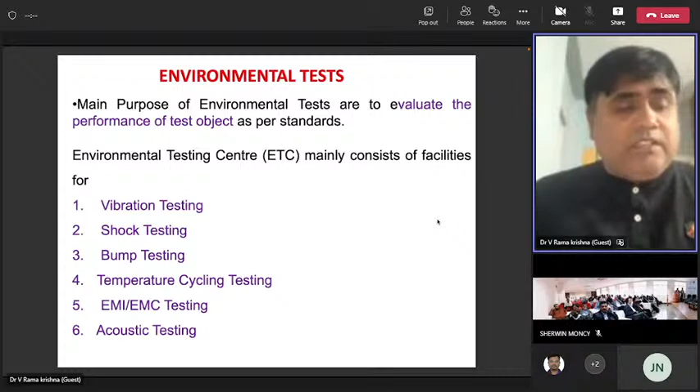There are different types of environment testing, like vibration testing, shock testing, bump testing, temperature cycling testing, EMC, as well as acoustic testing. But I want to discuss initially about vibration testing.

So what actually is meant by vibration? Vibration is nothing but the response of a system to a given excitation force. If you give a certain force to any system, how it behaves, how it responds, that is nothing but vibration. So if you hit any man, how he responds, whether he will be in a cool condition or hot condition - that response indicates the vibration of a system.

So any motion that repeats itself for a definite interval of time is also called vibration or oscillation.

In vibration testing, as I discussed, the main purpose is to validate the design for performance for its intended use, because different systems are designed for different purposes. Like at NSTL, we design certain torpedoes, mines, and decoys. The main purpose is to be validated. It will be designed and fabricated. Once fabricated, both the environment testing should prove, as well as the performance should prove.

So for a particular vibration load, it was designed, but whether it is capable of taking that load or not, we measure using vibration testing.

At NSTL, as it is a naval lab for the DRDO, we design, fabricate and test different types of underwater weapons like torpedoes, mines, and decoys. This vibration division also does vibration testing of different equipment and different types of mounts, which are given by the Indian Navy.

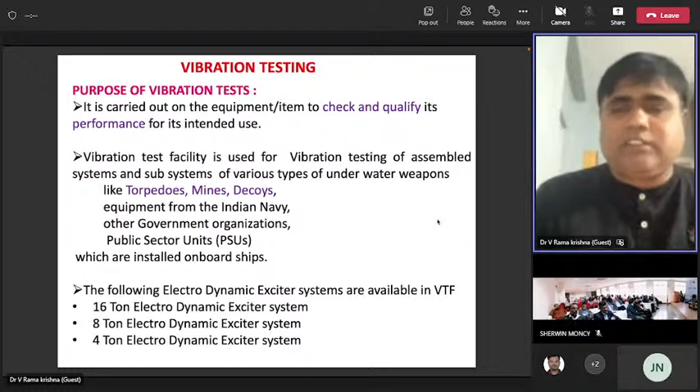The maximum specification for vibration is a payload of about 3 tons on the 16-ton shaker, maximum acceleration up to 100 G, frequency range up to 2.5 kHz, and maximum displacement of up to 38 mm.

This 16-ton shaker is a water-cooled system, and the 4-ton and 8-ton shakers are air-cooled systems. So the different standards we use depend upon the type of equipment. Some of our naval weapons use gold standards, mainly JSS 55555 as well as MIL standards, and different types of tests like endurance test, resonance test, sine test, random test, sine-on-random, and random-on-random in all 3 axes.

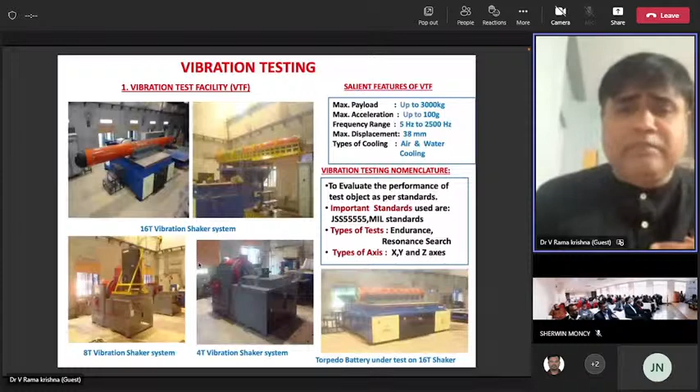So these are the typical equipments which will be used in our NSTL, and these are some of the features as discussed. There are different types of tests, and these are state of the art test facilities. As discussed, it is one of the second biggest, having a 2.5 by 2.5 table size with different types of shakers available for different types of tests: sine test, random test, sine-on-random, random-on-random, etc.

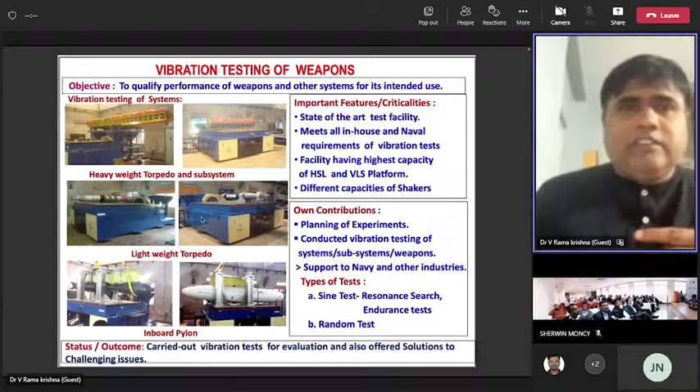And these are some of the components we'll go through using the vibration testing. This is one type of testing which we have done for the qualification testing of one of the varieties of torpedo. We did both the sine test as well as the random test, and both tests in all axes have been successfully carried out and approved. It has now been done for the validation trials for the Indian Navy.

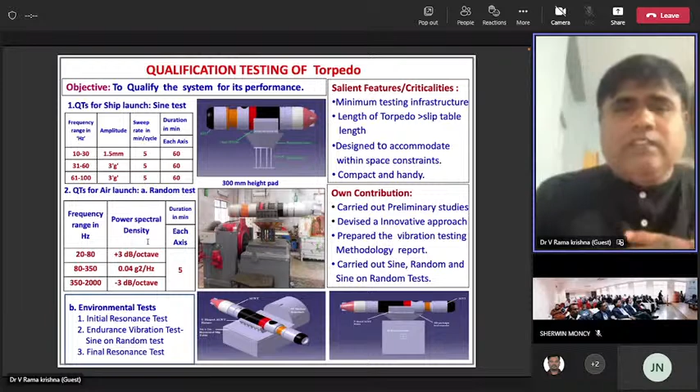The main principle behind this vibration testing is Fleming's left hand rule. As we know, the electric current is shown by the middle finger, and the magnetic flux is shown by the forefinger. The force, excitation force, is depicted by the thumb. Both are in 3 mutually perpendicular directions, and it mainly works on F equals BIL, where B is the magnetic flux density, I is the current, and L is the length of the drive coil, and that excitation force is equivalent.

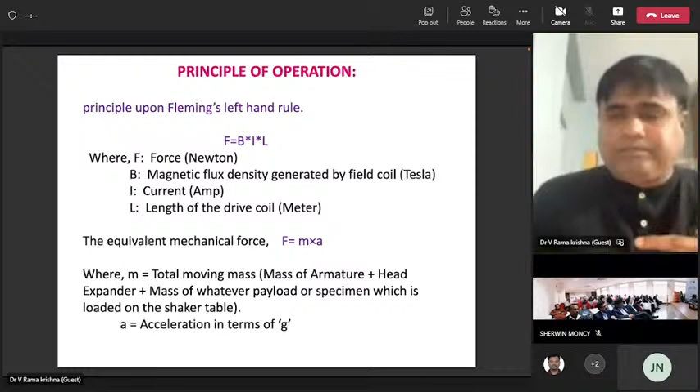This force is also equivalent to mass as the product of mass and acceleration. The total mass indicates the mass of the armature and the head expander, as well as the payload of the specimen. The main important parts of the vibration shaker are the controller, power amplifiers, and the electrodynamic shaker, as well as the horizontal slip table, vertical load support platform, and the cooling system. These are the important parts of the exciter system.

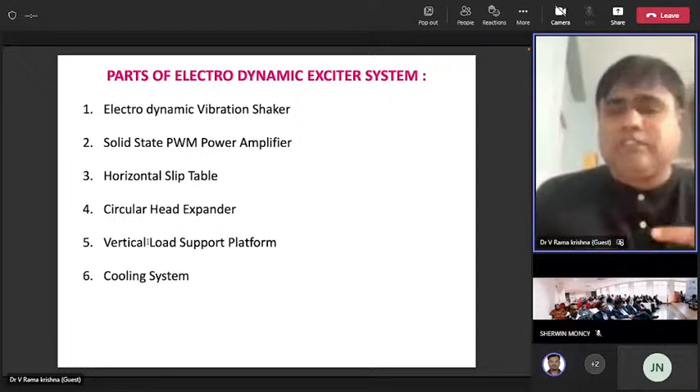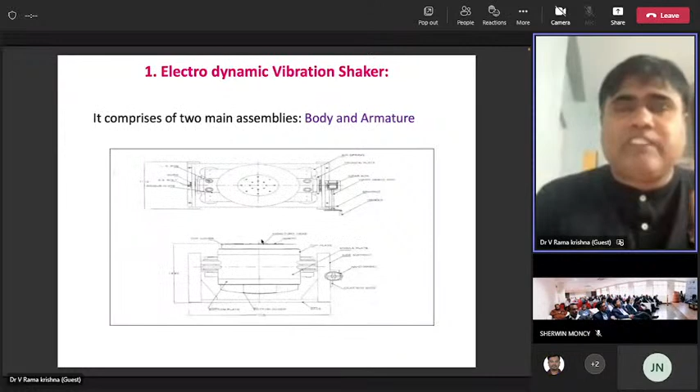This figure shows the dynamic vibration shaker, mainly consisting of the armature and the body. The inside part is the armature, the outside part is the body. Supply is given to this armature as well as the body, and the magnetic flux is generated perpendicular at 90 degrees, and the corresponding excitation force is generated in the vertically upward direction. That is the main source of energy required for the excitation of the different types of particles.

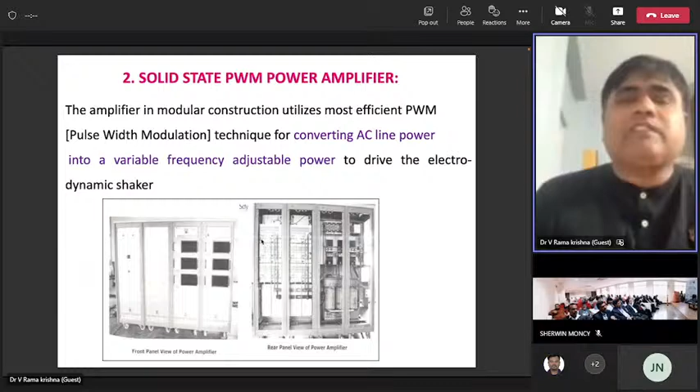And these are the power amplifiers, where the given input excitation is provided using the controller. The controller sends a signal to the power amplifier where amplification takes place. From the amplifier, the signal goes to the shaker, and the shaker is connected to the vertical load support or the horizontal platform using a bull nose connector, and then excitation takes place. The main purpose of the power amplifier is to amplify the signal, and the AC signal is converted to VVF, variable frequency drive. That is the main aim of this power amplifier.

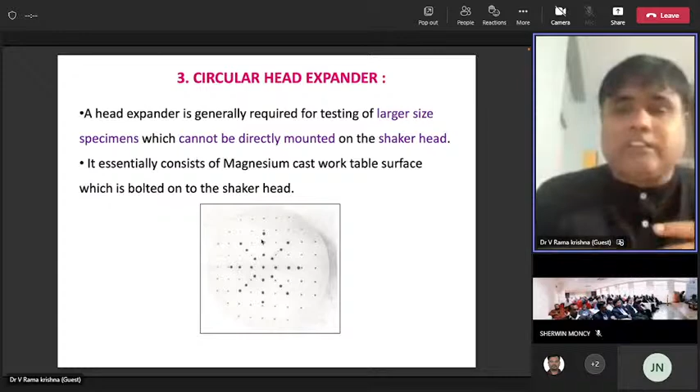And the circular head expander, this will be connected to the vertical Z direction, where we cannot accommodate our objects directly on the shaker head. So this is a separate unit made up of magnesium alloy. This will be assembled in the vertical direction, and then the object required for the vibration will be assembled to the circular head expander. Similarly, this is the horizontal slip table.

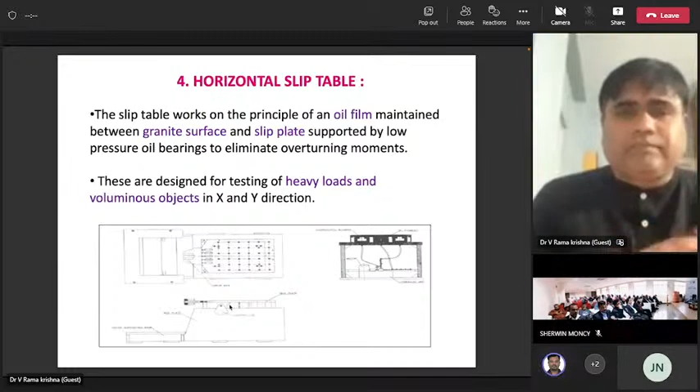The horizontal slip table is the place where we assemble our heavy load objects onto the horizontal slip table, and we can do vibrations in both the x direction and the y direction. Here, one oil film is maintained between the granite surface and the slip table to avoid friction, to reduce the friction. That is the main purpose of the horizontal slip table.

And the vertical load support platform is directly connected. So for some of the big objects, we cannot directly connect them onto the shaker head in the vertical direction, that is the Z direction.

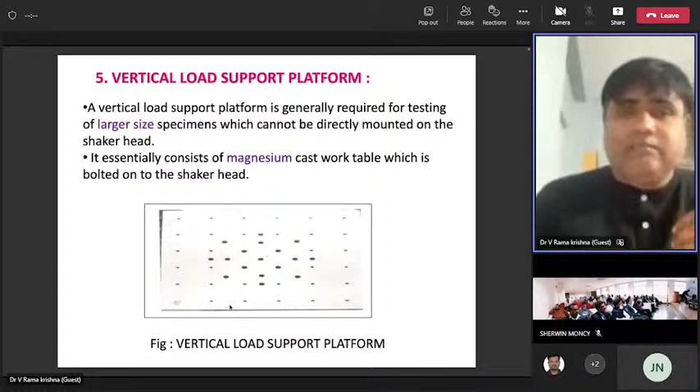This vertical load support platform for a 16-ton shaker with a 2.5 by 2.5 size can be assembled on the shaker head, and objects required for the vibration system will be connected to this VLS platform. This enables vibration testing in the Z direction. It is also made up of magnesium alloy, which has high damping properties.

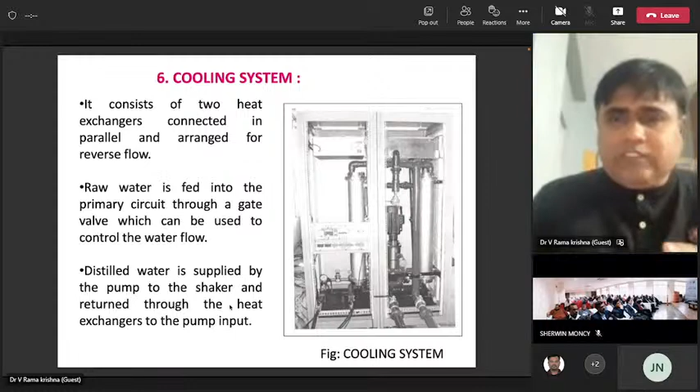The cooling system for 4-ton and 8-ton shakers is air cooling, but for a 16-ton shaker we have a water cooling system. There are two units with a heat exchanger present in between, where the temperature generated inside the shaker is reduced using distilled water. The distilled water circulated from the shaker exchanges heat with incoming cool water, so the temperature of the distilled water reduces while the incoming water's temperature increases. This heat transfer takes place continuously in a circle. That is the main aim of the water cooling system.

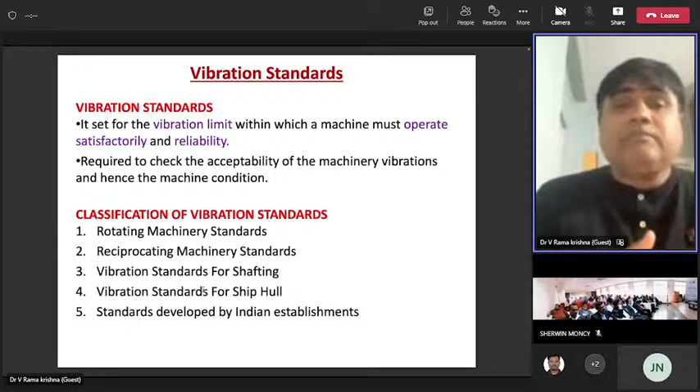We do vibration testing with different types of standards for different applications, such as rotating machinery standards, reciprocating machinery standards, and vibration standards for shafting systems. For ship hulls, different types of standards exist. Some standards are developed by Indian companies like NTPC, NSTL, and ONGC for different applications. For rotating machinery, there are standards like SNAME for the USA, ISO standards, Bureau Veritas standards, VDI standards, and Canadian IS standards. These are the different types of standards used for different applications.

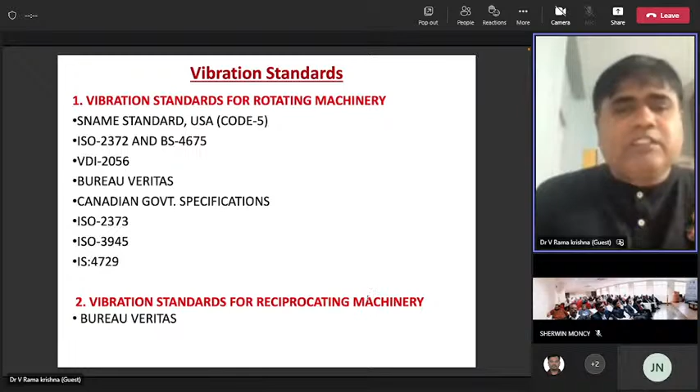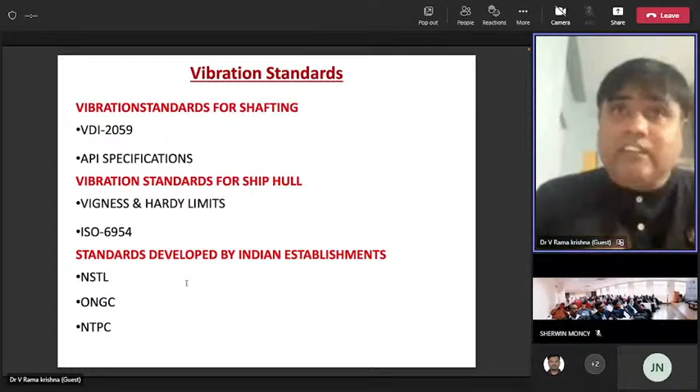For rotating and reciprocating machinery, we mainly use the Bureau Veritas standard. For shaft systems like propeller shafts or other connecting shafts, VDI and API standards are used. For ship hulls, Vigness and Hardy limits standards are used, as well as ISO standards. Some Indian establishments have developed their own standards as well-NSTL has our own standard for different applications, and ONGC and NTPC also have different standards for different applications.

In addition to our internal testing, we also support other DRDO testing labs, like ADA Bangalore for pylons, since this facility is the second biggest in India and many people come here for testing. Equipment from BEL, BDL, and ECIL also comes here, mainly for supply to the Indian Navy, and some private companies use this facility as well.

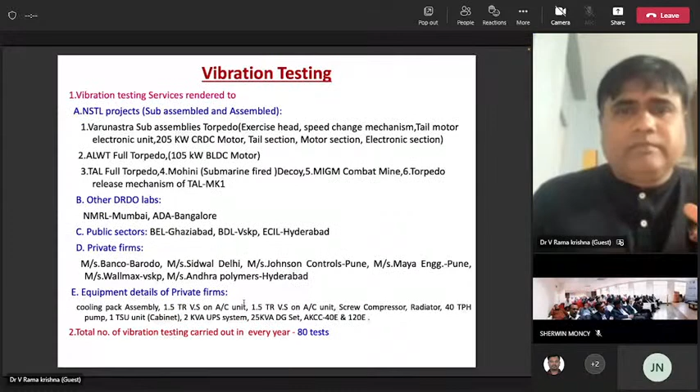Broadly, we do around 80 to 100 vibration tests yearly, depending on the workload. These are the basics about vibration testing. My second topic is vibration control, but before discussing vibration control, I want to discuss stealth technology-what is meant by stealth?

As we've seen, these are two types of ships, Visby and DDX, and two other types, F-218 and D-187. In most of these, the radars, guns, and torpedo launchers are visible from outside. But in these two figures, everything is covered inside and not visible from outside-these are called stealth ships, while the other two are non-stealth ships. So what is meant by stealth?

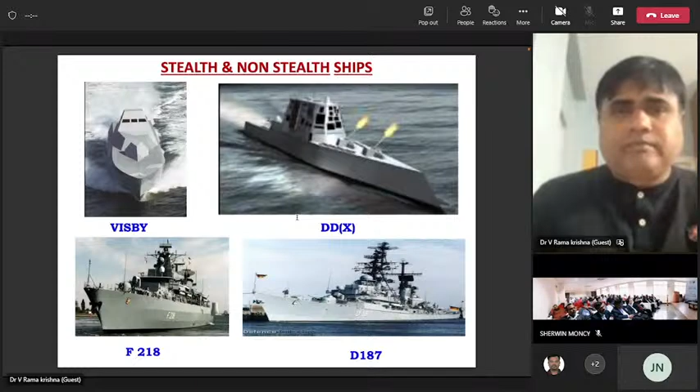First of all, we have to protect our ships and submarines from incoming enemy bombs or guided missiles. So we have to protect our marine platforms, both the above-water structure and the below-water structure. Above the water is called the superstructure, and below the water is the hull structure. The enemy can launch missiles or bombs targeting the superstructure, and can also launch torpedoes or underwater mines from the sea, so we have to protect the hull from the sea as well.

If we become more stealthier, in addition to protecting our equipment, ships and submarines, we get the chance to have first strike capability. If the enemy cannot detect us, we can hit the enemy first. We can go near the enemy and strike them.

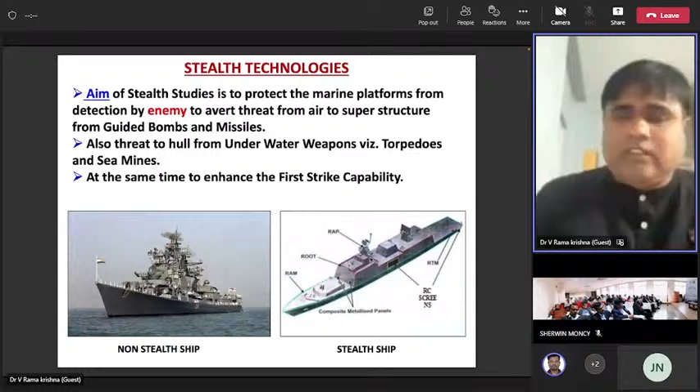Some ships are non-stealth, others are stealth-like. On the outside, if we create structures like radar absorbing structures, radar absorbing materials, and RCS screens for the ship, we reduce one of the key signatures. Radar cross section is one of the signatures we can reduce from the outside, above the water level. Below the water, other signatures exist.

So what does creating a signature actually mean? We have to create our signatures so as to avoid detection by the enemy. If we make our signatures equivalent to the atmospheric signal, we can reduce our noise, our IR, and our RCS, so the enemy cannot identify whether there is a ship or just normal atmosphere. That is the main aim of stealth.

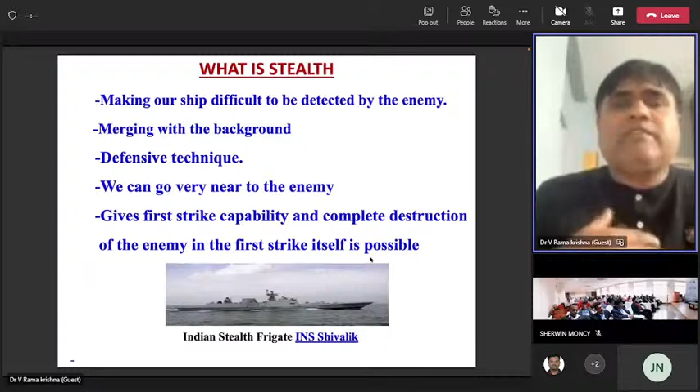Because if we become stealthier, and this is a defense technology, we can approach the enemy and hit them fast, so that we win the war. That is the main aim of stealth. These are broadly the spectrum of stealth technologies.

These are the signatures that need to be reduced to become more stealthy, like acoustics. In acoustics, we have vibration and noise signatures. Then there's IR, the infrared signature, because most ships and submarines generate heat or exhaust at a certain temperature. These signatures need to be reduced.

Radar cross section, as we discussed, relates to the shape of the structure above the water level - these shapes are to be modified to avoid radar cross section. There's also LCS, laser cross section, which we also have to reduce for the superstructure.

And hydrodynamic wake, which is a bubble-like structure that trails behind the ship as it moves. This hydrodynamic wake also needs to be reduced.

And magnetic signature - as the ship or submarine is made of magnetic material, and the earth has its own magnetic field, these two factors combine to develop magnetic signatures. The enemy can detect these signatures too, so they need to be reduced.

And ELF, extremely low frequency emission signatures, are generated because of the two dissimilar materials of the ship and the propeller. The ship is made of magnetic material like iron, while the propeller is bronze or another kind of material. Because of these dissimilar materials, ELF signatures are generated, and the enemy can detect them too. If we reduce all these signatures and make our ships and submarines equivalent to the atmospheric signature, we become the most stealthy, so the enemy cannot detect us.

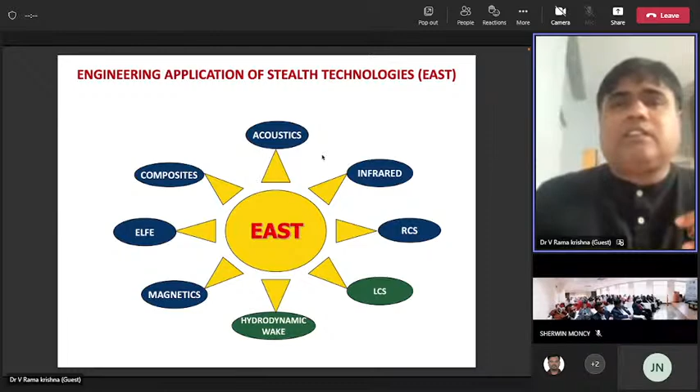Out of these signatures, I will discuss the vibration acoustic signature. Underwater, the enemy can detect using sonar - let's assume this is the ship and this is the submarine, where our sonar sends an acoustic signal. In air, electromagnetic signatures work, but underwater EM signatures won't work, so hydroacoustic signature is mainly useful for detection underwater. So underwater, only acoustic signals are sent - it sends a signal and receives a signal. Depending on the received signal, we can identify where the ship or submarine is located.

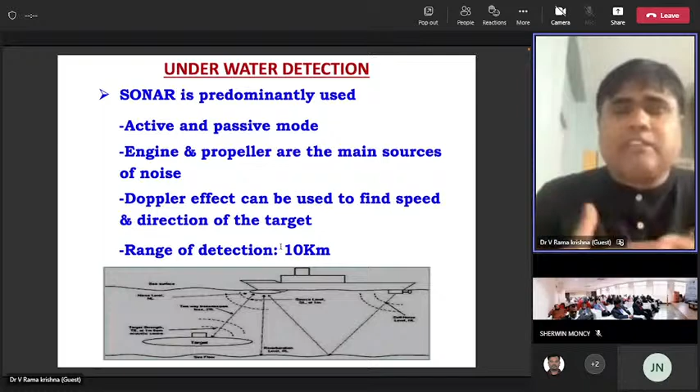Acoustic stealth is one of the most effective methods for detecting underwater naval vessels. Acoustic signature is the main prominent signature where we can detect. We can increase our acoustic stealth capability by minimizing the acoustic energy created by all the machines.

As we know, in ships and submarines there are different types of sources, like engines, gas turbines, pumps, motors, etc. All these, because of unbalanced forces and couples, generate vibrations. These vibrations are transmitted from the source to the underwater hull through the path, and from there transmitted from the hull.

It is transmitted as radiated noise inside the water. These are called machinery noise. The noise and vibrations generated inside the engine room are called machinery noise.

The propeller, which rotates at the back of the ship's hull, when rotating cuts the water and generates propeller noise. This is machinery noise and propeller noise.

When the ship moves through water, it cuts the water, and because of turbulent boundary layer excitation on the incoming fluid, the ship also vibrates. That is called flow noise. Flow noise, machinery noise, and propeller noise combined are called radiated noise.

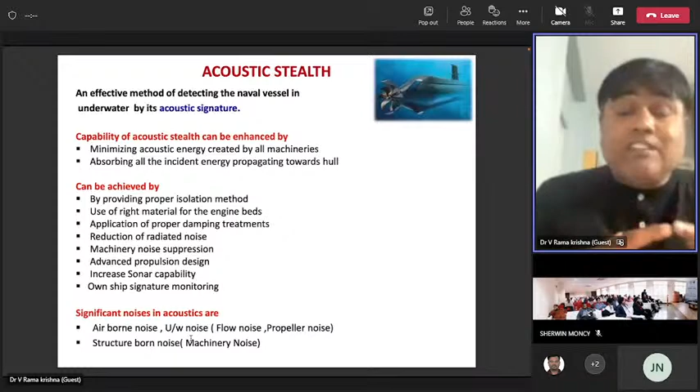Structure-borne noise is the machinery noise, as discussed previously. These types of noises are to be minimized to become acoustically stealth.

As we know, underwater there are sound waves also. A sound wave is nothing but a pressure disturbance that propagates. When the disturbance starts, it propagates from one place to another, and the speed at which it transmits depends upon the medium. The main reason for sound waves is the vibration of solid surfaces.

Any sound which is objectionable to us is called noise. The main difference between sound and noise is that noise is not useful, or is objectionable to the human ear, and is called noise.

The acoustic signal is generated from the source and travels to the receiver. From the source to receiver, it transmits through so many paths. In between the path, there are airborne noise and structure-borne noise segments, and different types of routes—structure-borne noise, airborne noise, and so on.

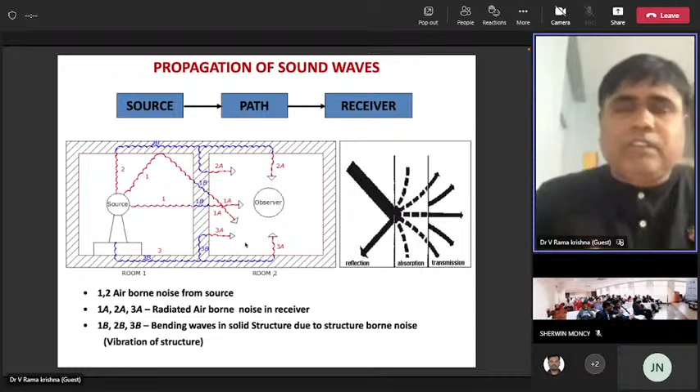If we can reduce this acoustic noise at the source itself, that is better. If not possible, we can reduce it in the path through which it is transmitting. If it is not feasible at the source or path, we can reduce it at the receiver side. These are the three modes of reduction: source, path, or receiver.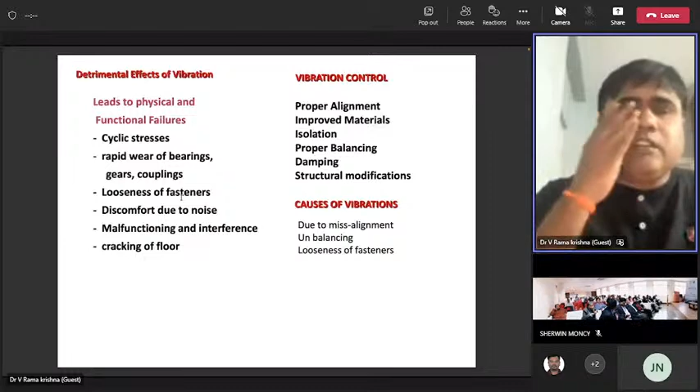Because of this vibration, certain problems are observed in physical equipment, such as physical failure or functional failure. It may not operate, or it may get physically damaged because of cyclic stresses, or because of wear of bearings, gearing, and coupling. Vibration may also lead to failure or looseness of fasteners, or generate noise that causes discomfort to the human operator, and it leads to malfunction of the equipment and ultimately failure.

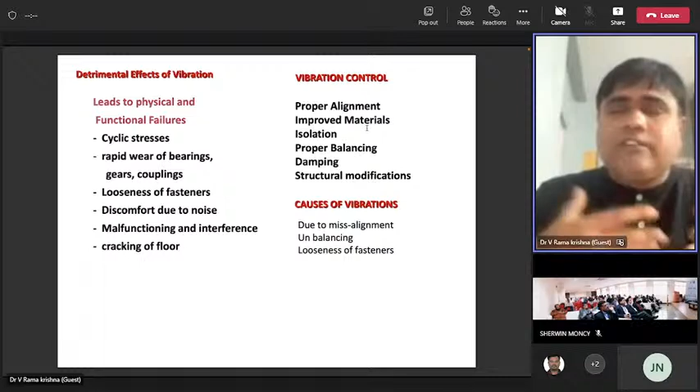So how to control these vibrations to avoid these failures? By proper alignment, the shafts will be properly aligned, or by improving the different types of best materials, or by proper isolation methods, isolation techniques can be made, and proper balancing also can be made, or damping, different types of damping layers, damping structures like free layer damping treatment, or constrained layer damping treatment, or tuned mass dampers, or MR magneto-rheological dampers. We can do different types of control, or by changing the structure. Structurally, you can modify to control the vibrations. These are some other control techniques.

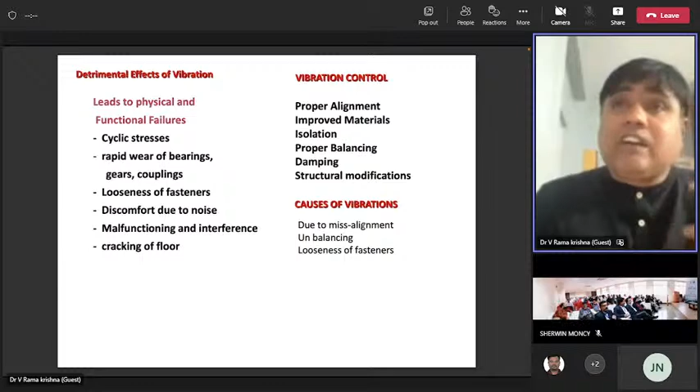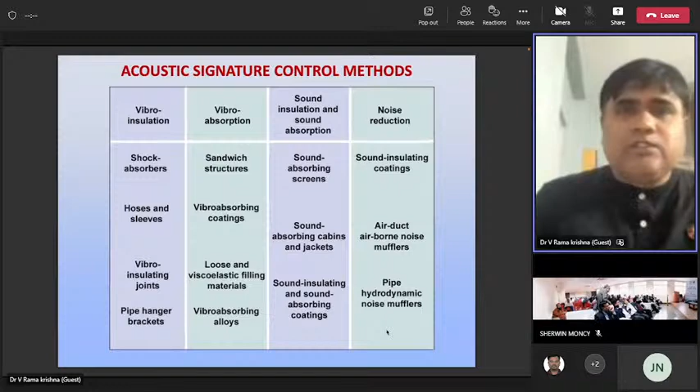Or noise levels can be reduced by using sound insulating coatings, air ducts, mufflers, or hydrodynamic noise mufflers. We can use these techniques to reduce the vibration as well as the noise levels.

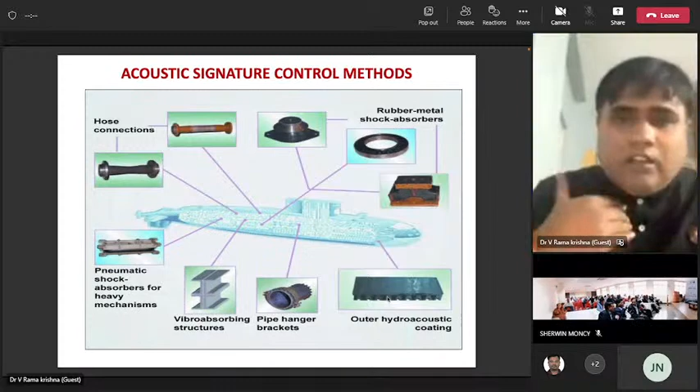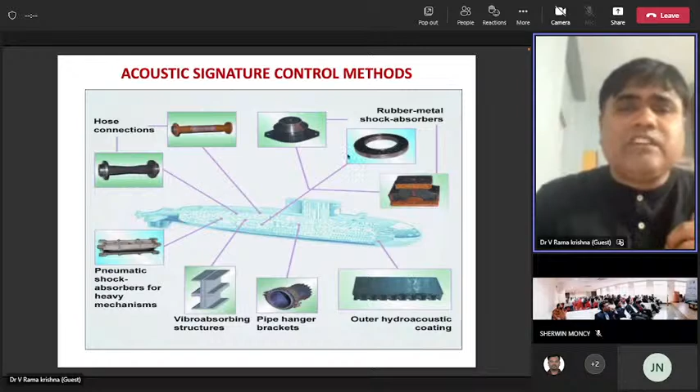Or hydroacoustic coatings, like submarine hulls will mainly use outer hydroacoustic coating, and pipe hangers, absorbing structures, or pneumatic mounts, or hose connections. Different types of components will be installed to reduce this acoustic signature.

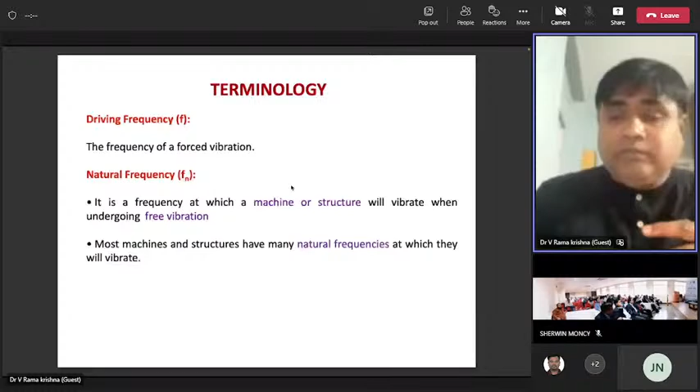So as we know, these are some basic definitions. Driving frequency is the frequency of the forced vibration. Natural frequency of the system is nothing but the frequency of the structure when it is operating with free vibration. And these two vibrations should not be coincident to avoid resonance.

When the natural frequency and the excited frequency both match, it leads to resonance, which is a catastrophic failure. This condition should be avoided while designing structures. And the speed at which the resonance frequency occurs is called the critical speed of the equipment.

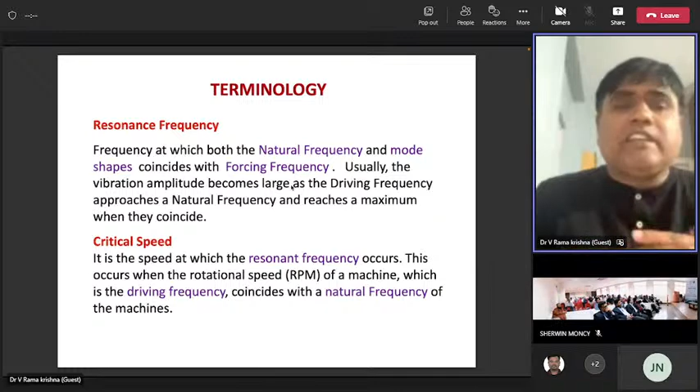And some other basic definitions: damping is nothing but dissipation of vibration energy into heat energy. That is damping. And there are undamped and damped vibrations as well.

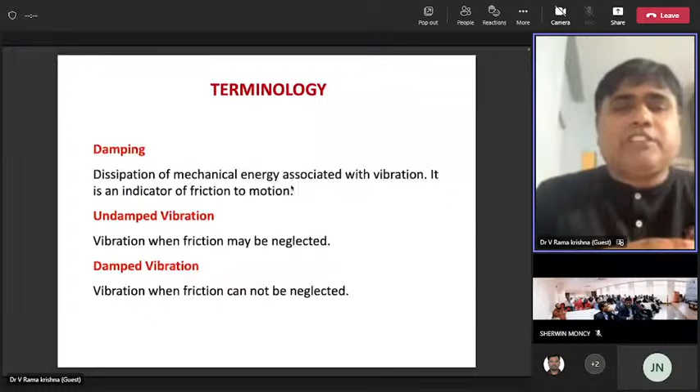And some of the acoustic products which have been designed, fabricated, tested and fitted onboard ships for the last 20 to 30 years at NSTL. These are some of the equipment carried out to reduce these noise levels: the two-stage isolation system, acoustic silencers, acoustic enclosures, and damping treatments, free layer damping and constrained layer damping treatment, and advanced damping materials, and TMDs, tunable mass dampers, MR dampers, magneto-rheological dampers, and thermoacoustic silencers, and active noise cancellation techniques.

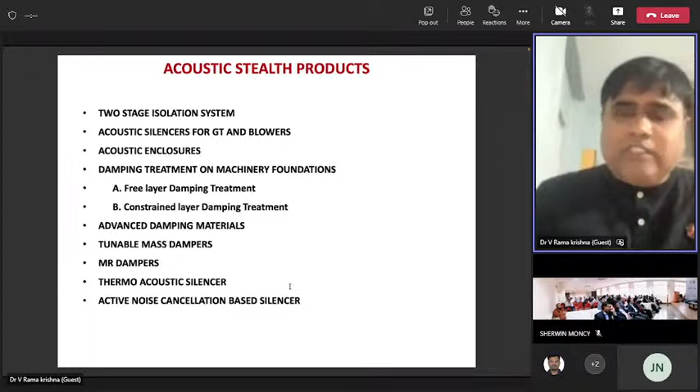These are the types of some other products developed by NSTL to avoid detection by the enemy, to become more stealthy.

So first of all, let's discuss vibration isolation. What is actually meant by isolation? Vibration isolation is nothing but avoiding the transmission of vibration from the source to the receiver. Any pump or gas turbine will be resting onto the foundation, and from this foundation...

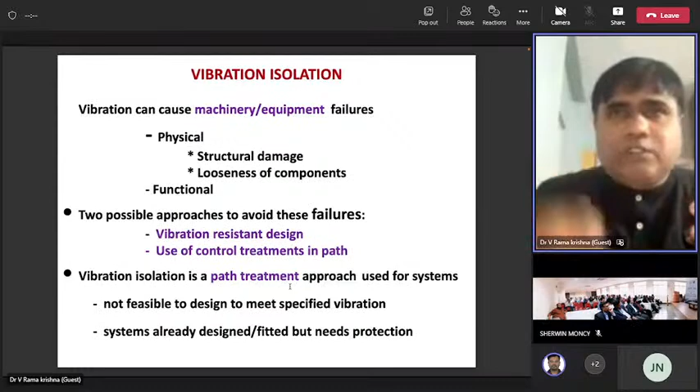Yes. So the vibrations are transmitted from the source to the receiver, to the foundation. In between these, there are two types of systems. Let us assume this is a forced vibration of the spring mass damper system, which is connected to the mass system.

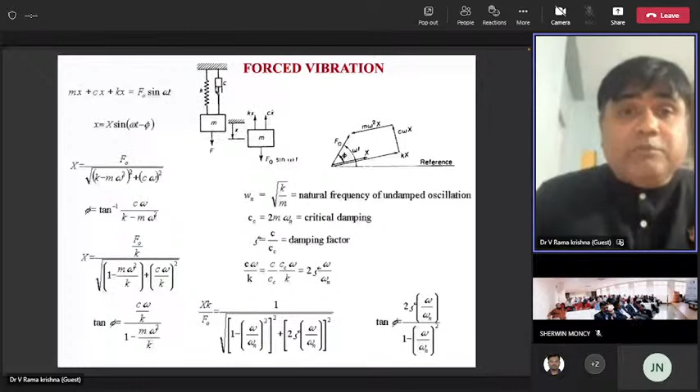In between that, if you keep some springs or dampers, we can reduce the vibration from the source to the receiver. And this is the vectorial representation. The main aim, the main intention, is transmissibility. Transmissibility is nothing but the force transmitted versus the force applied. The transmitted force, the force applied, is to be reduced from the hull. This is the transmissibility curve.

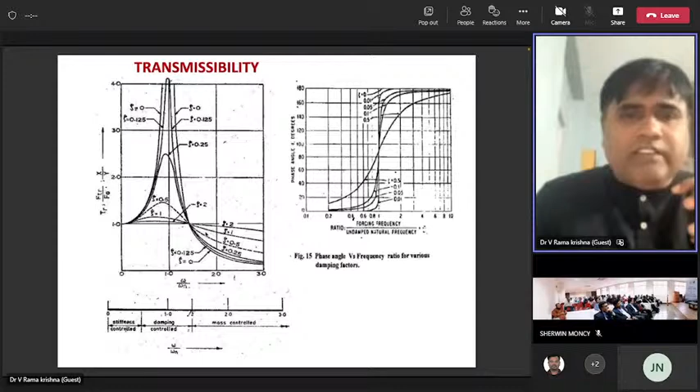Basically, we have to create the isolation zone and the amplification zone. If omega by omega n is equal to 1, the resonance condition occurs, where the amplitude transmissibility increases to infinity. Our aim is to design the isolation zone where omega by omega n is greater than root 2, where we can apply different types of damping treatment to reduce the transmission. This is our design area of zone of intention, where omega is greater than root 2.

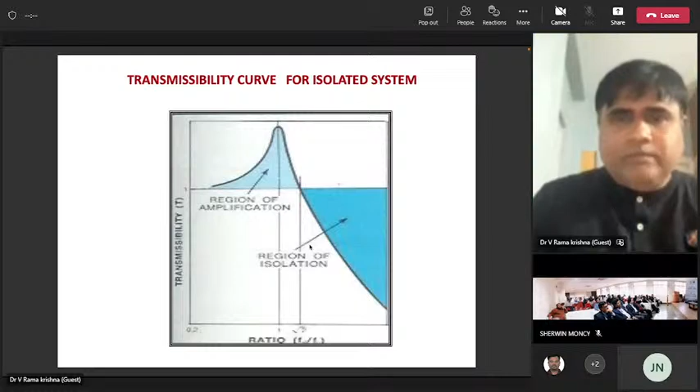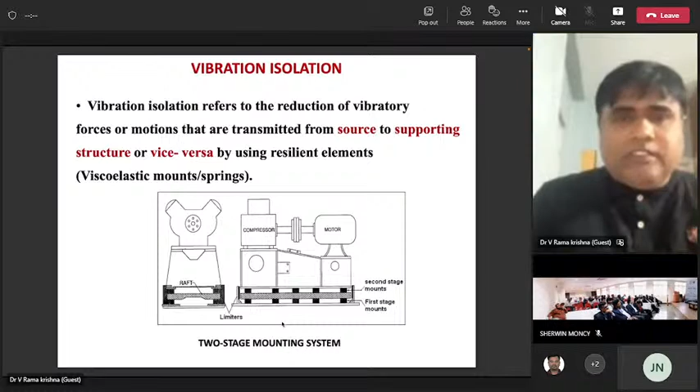This is the typical two-stage isolation system. These are the two-stage isolation equations, and this is the design procedure. I'll just skip all these slides.

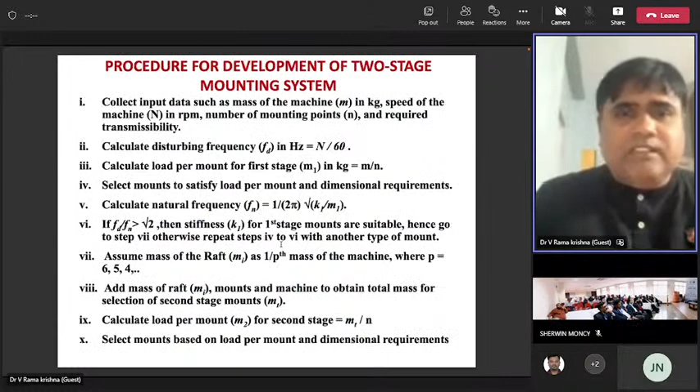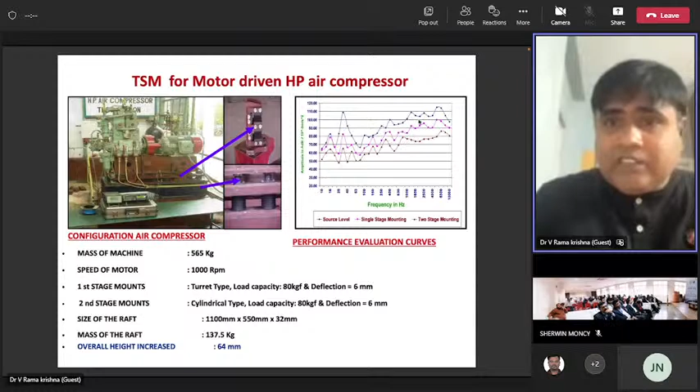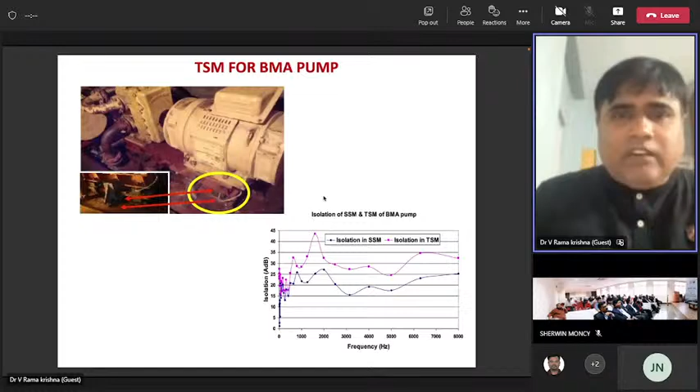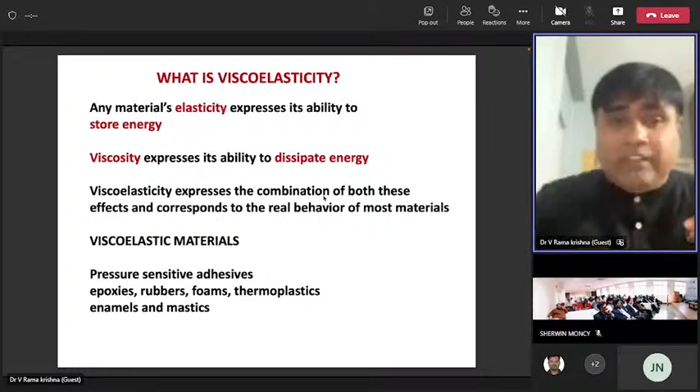The second control method is vibration control by damping. Damping is nothing but the viscoelastic nature of the material, like rubber products. It has both elastic nature as well as viscous nature. Both natures are mainly useful to convert the vibration energy to heat energy, using equipment like rubbers, foams, thermoplastics, enamels, and mastics.

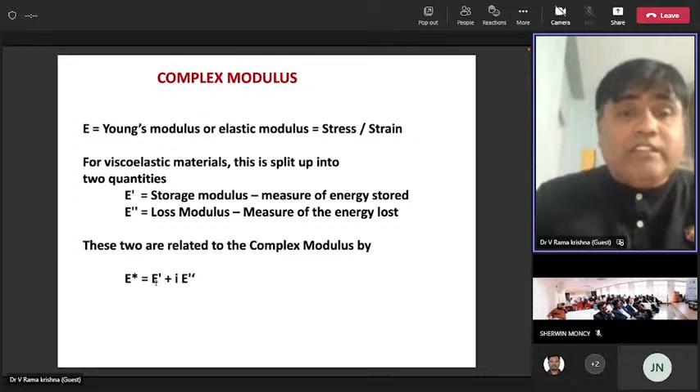Instead of Young's modulus, this component mainly considers complex modulus, consisting of E prime and E double prime - storage modulus and loss modulus. Loss modulus is the energy that is going to be lost, the conversion of vibration energy into heat energy, called the loss factor. This is the equation for the loss factor.

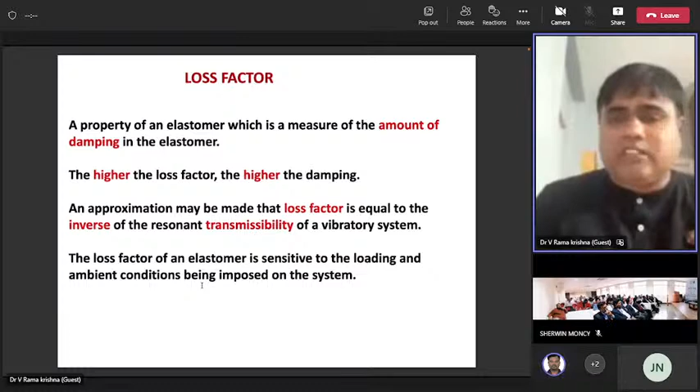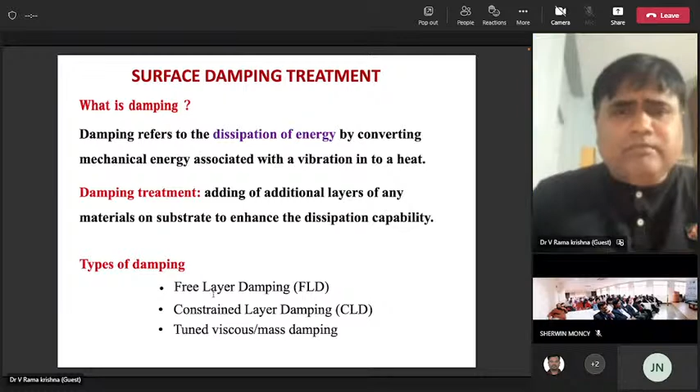There are mainly two types: free layer damping treatment and constrained layer damping treatment, along with the tuned mass damper. The main difference between these two is that FLD, free layer damping treatment, mainly consists of two layers - the base layer that we bond with the damping material - and the vibration conversion takes place using elastic nature or bending treatment.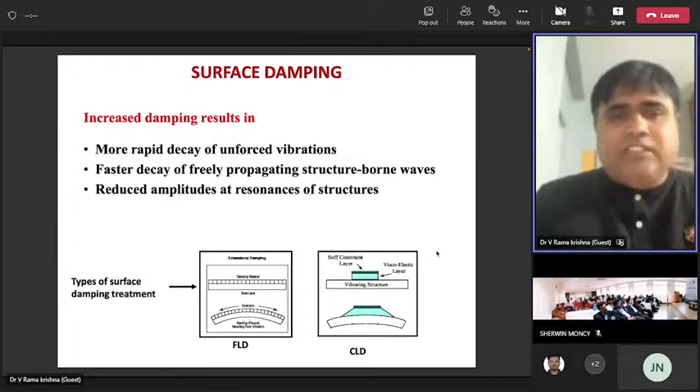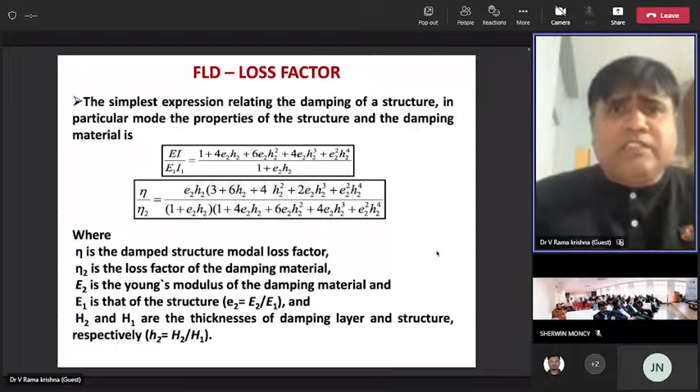This is a three-layer structure, where the vibration structure is divided so that a viscous layer is bonded, and above it the constraint layer - this is the constrained layer structure. Both are useful for different applications. This is the loss factor equation, where the higher the loss factor, the higher the conversion of energy. And this is the design of the FLD.

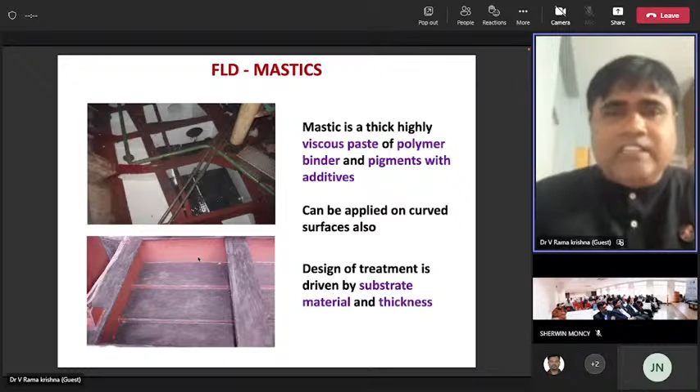This mastic FLD has been applied in some areas and on the barge as well as inside the ship. There has been a drastic reduction of vibration levels, and underwater noise can also be reduced by around 20 dB for a broadband spectrum.

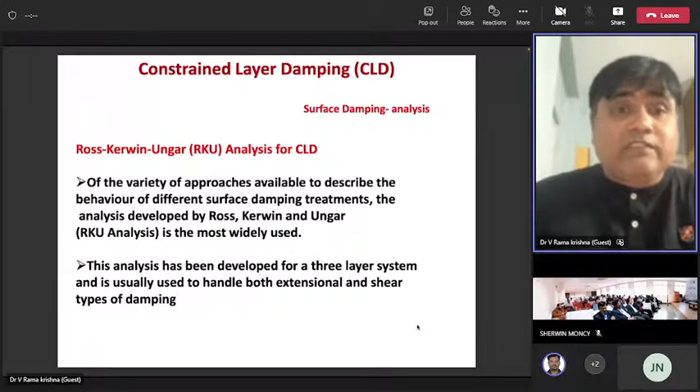This is the CLD damping treatment, which was designed using the RKU equation, Ross-Kerwin-Ungar equation. These are the applications where different foundations, different base plates, and different equipment inside the ship have been carried out, reducing both noise levels and vibration levels.

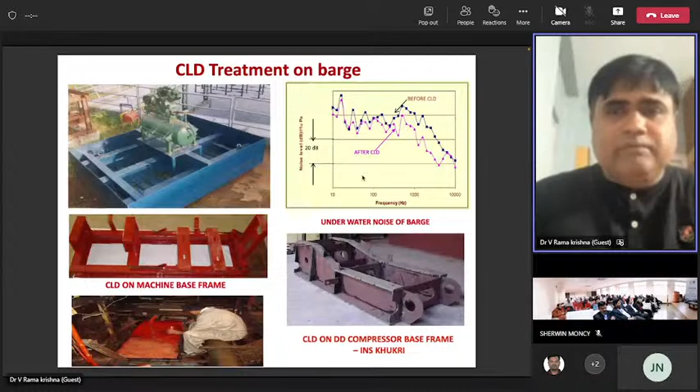Finally, the tuned mass damper. The main aim of the TMD is vibration reduction of tonal vibrations. As we know, at the natural frequency, vibration levels are higher. If you want to further reduce these tonal vibrations, we have to incorporate different types of separate equipment.

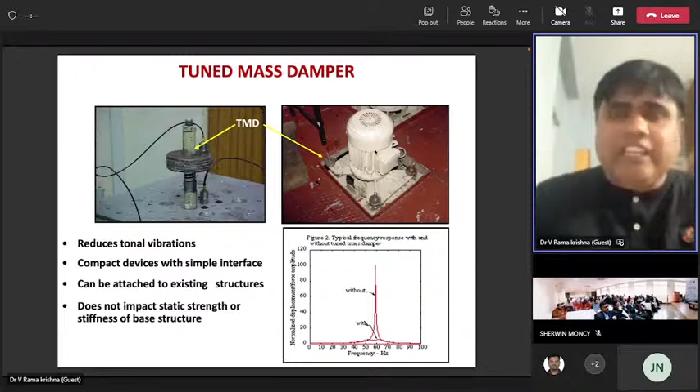We assemble these TMDs around the main base source, so that the base source vibration level will be reduced. The noise and vibration levels of the base source will be reduced. The main important factor here is that the natural frequency of the TMDs as well as the motors should be equal - only then can we reduce the transmitted vibration levels. These are the typical seawater pump test results of the TMDs.

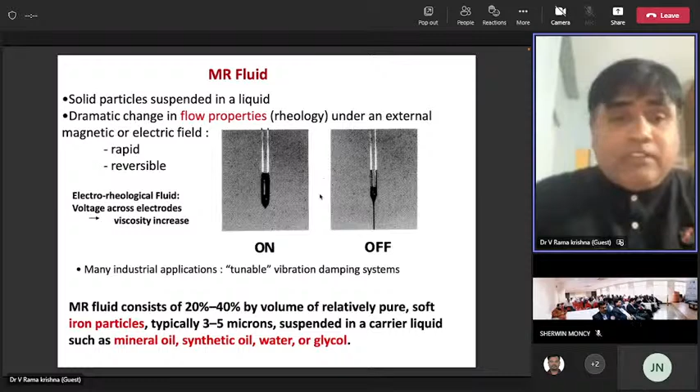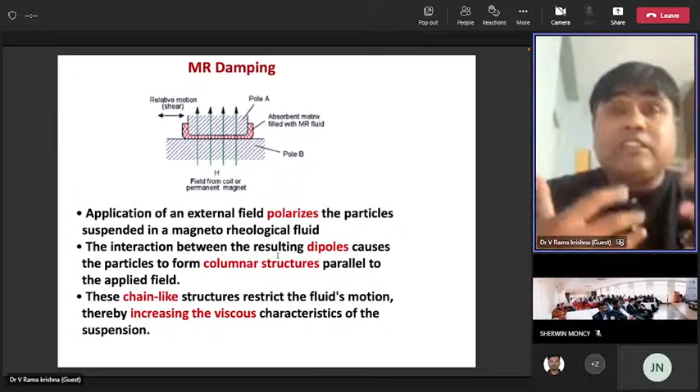And last are the ER dampers, the magnetorheological dampers, where the main aim is to change the flow properties of these particles so that vibration levels can be reduced. The main important components are the iron particles and mineral oils. If you supply a magnetic field or electricity, a chain-like structure is generated where the viscosity of the particles increases, and the vibration levels are reduced because of these ER dampers. These MR damper applications have been tested in Indian Navy ships.

Finally, active vibration control. Till now we discussed passive devices - vibration isolation, damping, and MRD - these are passive vibration control. Now we'll discuss active vibration control. The main concept in active vibration is that if you send a signal in reverse to the incoming signal, it becomes active vibration control. There are certain instruments we use, like sensors, controllers, and actuators, to give the reverse signal for active vibration control.

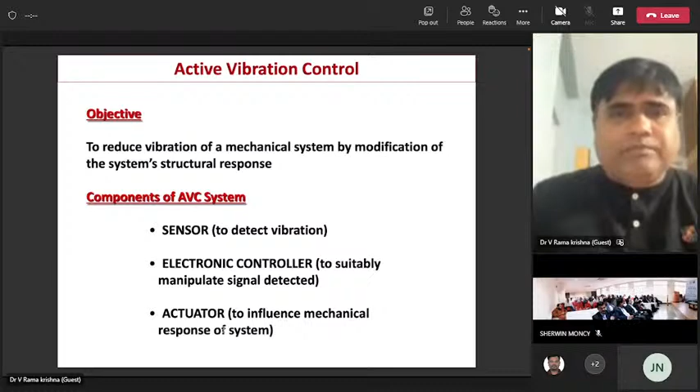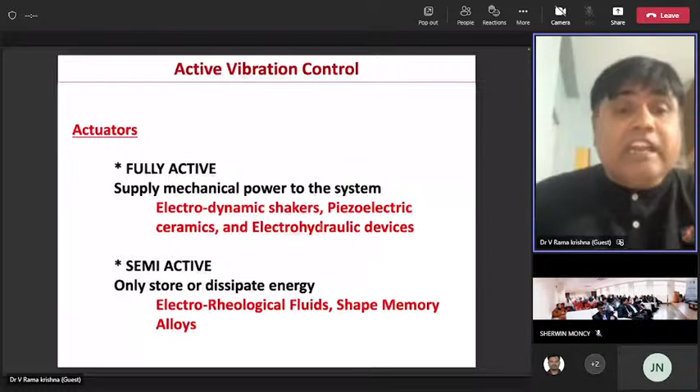There are fully active and semi-active devices. In fully active, electrodynamic shakers, piezoelectric ceramics, and electro-hydraulic devices are used. Semi-active devices mainly use ER dampers and shape memory alloys.

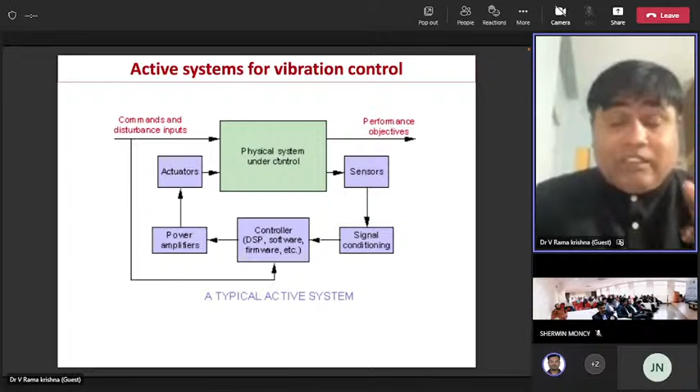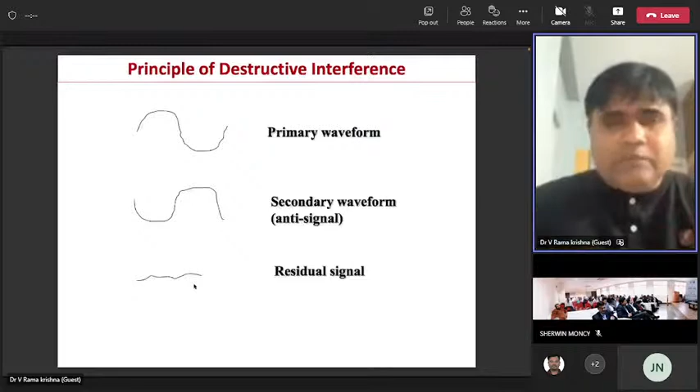This is a typical system where the main principle is that output signal vibration levels are measured using sensors, the controller sends the signal to the power amplifier, and the actuator sends the negative or reverse of the input signal so that the vibration amplification is nullified. That is the main concept - like if there's a primary source signal being sent, finally the signal becomes nullified, and the output signal becomes zero. That is the main aim of this.

This is the forward feed control; feedback control is also there. By using active vibration and active damping, vibration levels are reduced up to certain frequencies.